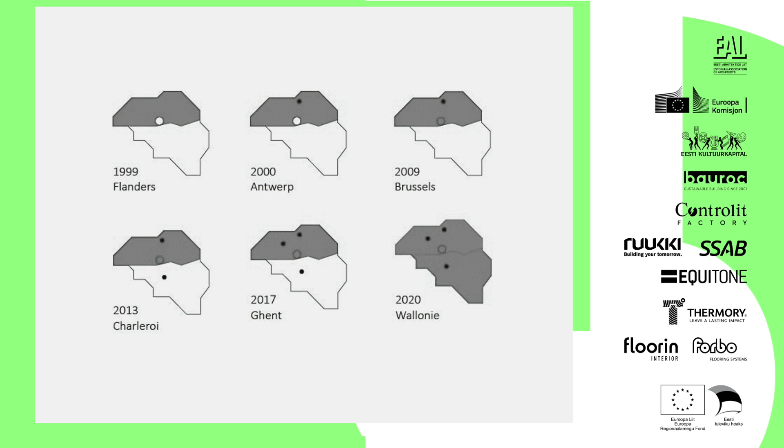So that's when they announced they would be having a bouwmeester immediately, but they are still busy discussing whether to do it or not. It's a tradition inspired by what is existing in the Netherlands, but which has been adopted in Belgium in a better way, I think. So we do better than the Netherlands. You should know there is always this kind of rivalry between Belgium and the Netherlands, firstly in football, but also in the bouwmeester stuff, and there we have been winning.

So the bouwmeester is not the head of the planning office, for instance. The bouwmeester is also not dealing only with the projects of the city itself. I'm also not deciding on building permits. I might be what is translated as the chief city architect, but it's not exactly the same. I'm also not just a consultant, and I'm also not a politician.

So what is the bouwmeester? The bouwmeester is an official. I'm working for the government and also appointed by the government, but working in an independent way. So you are recruited and you are paid to be critical. And why to be critical? Because the idea is to improve the quality of all urban projects. And if we're talking about quality, in the first sense, it's cultural quality. What you're building is for the future, is for the next generation. So it should be interesting. It should be the heritage of the future.

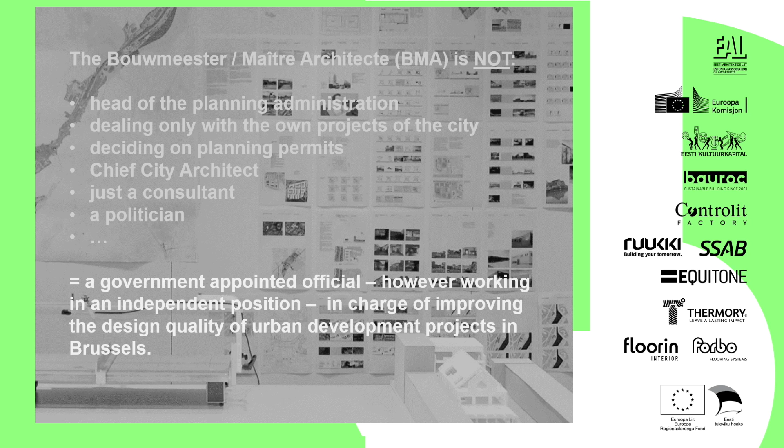Of course, we think about quality in a much broader sense, but this first element is really important. So the bouwmeester in Belgium and in Brussels is in charge of improving the quality of all urban developments in the city.

Sometimes I'm saying 'we', because the bouwmeester is in fact a team of something like 15 people now. A bouwmeester is appointed per term of 5 years. I'm doing my second term in Brussels now. I don't think you should do a third term, because from time to time the bouwmeester has to change in order to bring a kind of fresh perspective and to remain independent. If you're too much in the system, after a while you lose your independence, and then it's time to move and there should be another one. The procedure to appoint a bouwmeester is an open call, public procedure, and so on.

So I think you've understood, it's not about deciding. It's not about giving permits. It's not about hard power. It's about soft power. So we have to convince people all of the time. We have to convince the politicians to go in a certain direction. We have to convince private developers to make better projects. We discuss a lot. We build arguments.

So all of the time it's about this kind of work, and that's where you get your power. I think this kind of soft power, other ways of doing governance of urban projects in the city, is quite important. So you need, of course, the basic things: good building permits, good administration, interesting politicians, and so on.

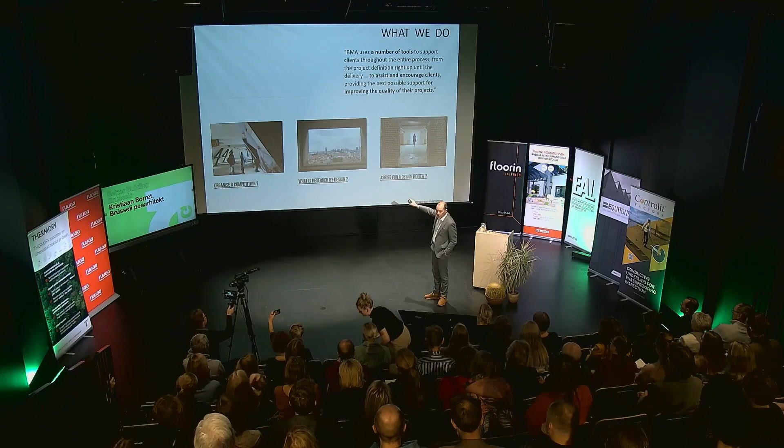What do we do in daily life? We have something like 3 pillars in our work. 50% of our time is organizing competitions. Then we do research by design, which I will explain. And we also have a classic system of design review mechanisms.

Competitions - we organize a lot of them because we think that's the main element to improve quality, and also to have public debate on what is quality of architecture and what is the best proposal. Something like 1 competition a week, so quite a lot for a city like Brussels.

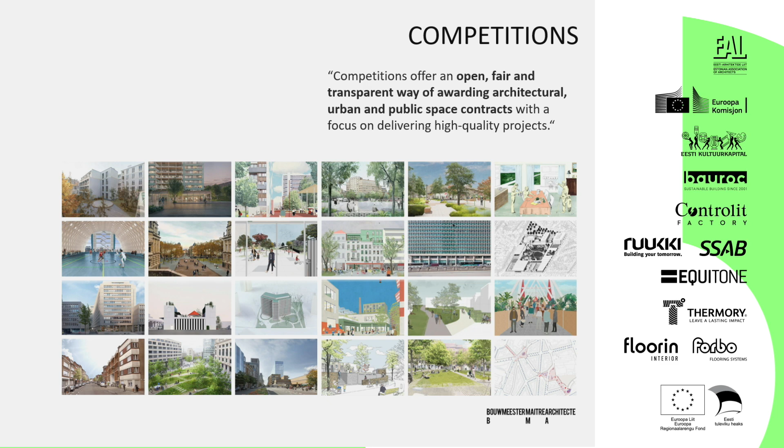We organize them in a fair way, so we have a set of rules. The fee for the architect is always fixed, so there's no competition on the fee. The architects selected, for instance 5 architects invited for the competition, are also paid for participating. So the conditions are fair and correct.

It's always a 2-step competition. The jury is professional, all these kinds of things. We organize it for big projects, for small projects, like kindergartens and so on.

Also for, you could say, ordinary programs, like a recycling station where you go to get rid of your waste. I think these kinds of ordinary programs deserve good architecture too.

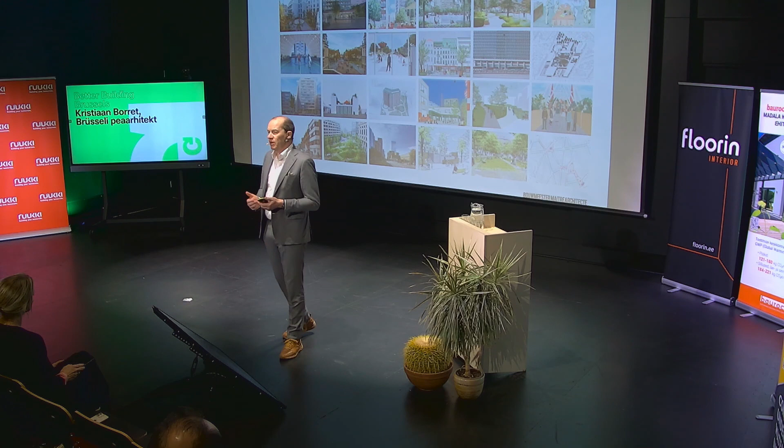We also do it for a lot of productive economy. In Brussels, we want to keep productive economy in the city - new economy, fab labs, innovating economy, but also ordinary jobs, like a place for a plumber. That's why in Brussels buildings are constructed especially for those kinds of programs, and we organize competitions for it, because we think those programs deserve good architecture as well.

We also organize competitions for private developers, so a lot of work is being done on that.

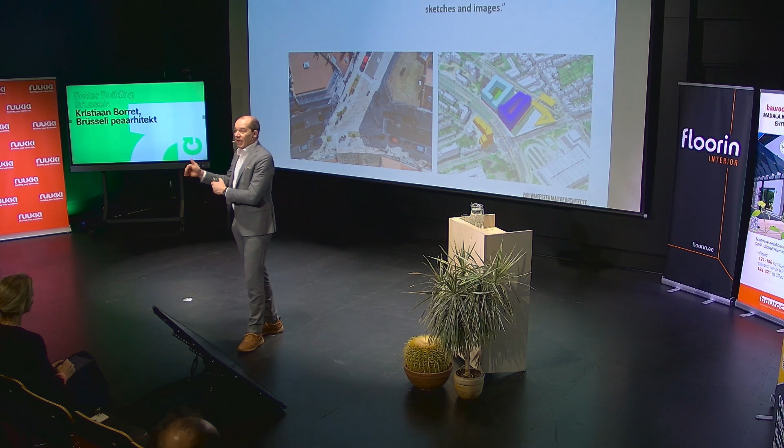Secondly, research by design. I hate it when we're discussing the quality of architecture or an urban plan and we just have texts - notes for government decisions, these important texts, or Excel tables with the profitability, the square meters, and the revenue supposed to come from it. But you can't build a city in Excel.

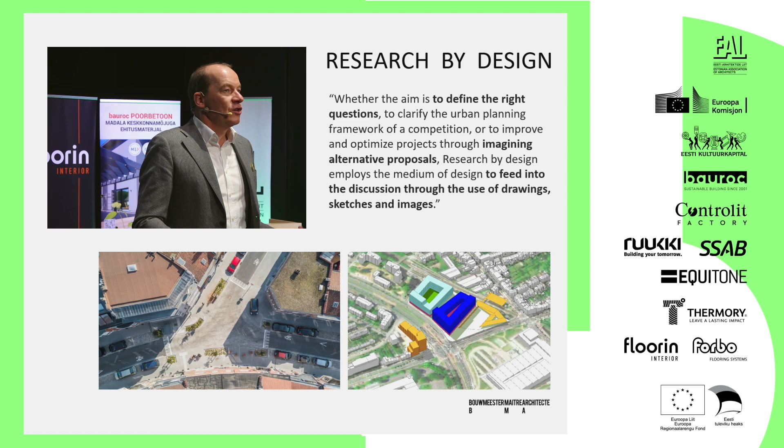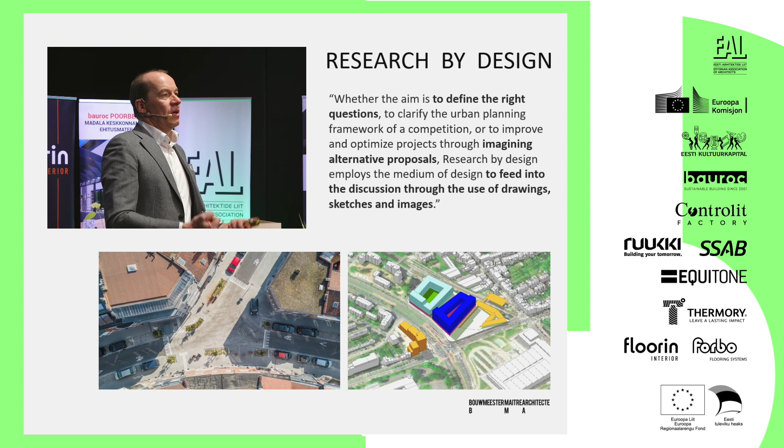So you need drawings, images, maps. I want these kinds of things on the table as well, because that's our tool - that's the way we architects and urban planners, designers, express ourselves. So that should be recognized as a medium that's important in decision making.

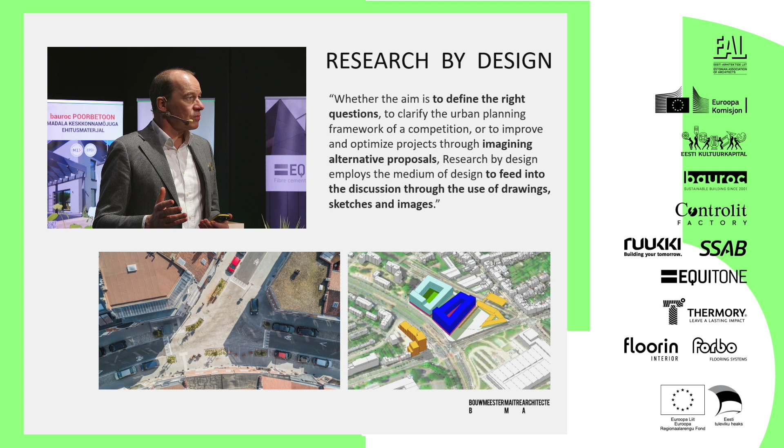That's why in the team of the Bouwmeester we have 4 people who are drawing, making design proposals - not to build them, because we don't want to build ourselves, not at all, and perhaps mostly the better architects are outside. That's why we organize the competitions, but we use the drawings to feed the debate, to show alternatives.

To translate an Excel table - we want 30,000 square meters - into a design. Then we show the image: this is 30,000 square meters. Do you want that? And in many cases, no, that's much too dense, and so on. It's representing what you've been deciding at the level of an Excel table. So it's a very simple example of how design, our tool, can help clarify things, to block projects, or to push projects forward.

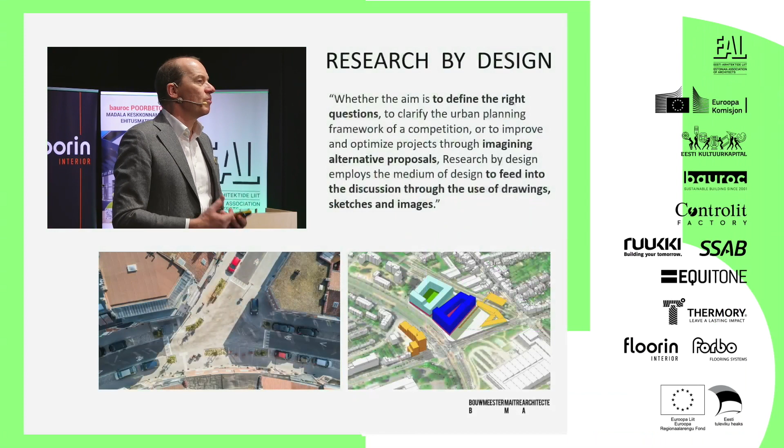Design and research by design should be part of the game, part of the policy on urban quality.

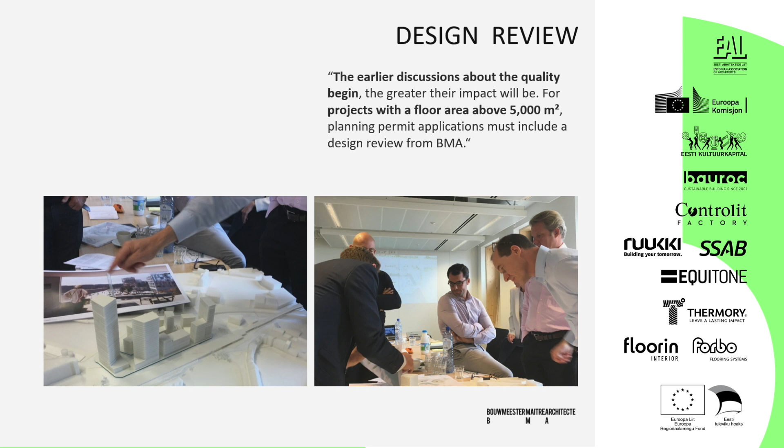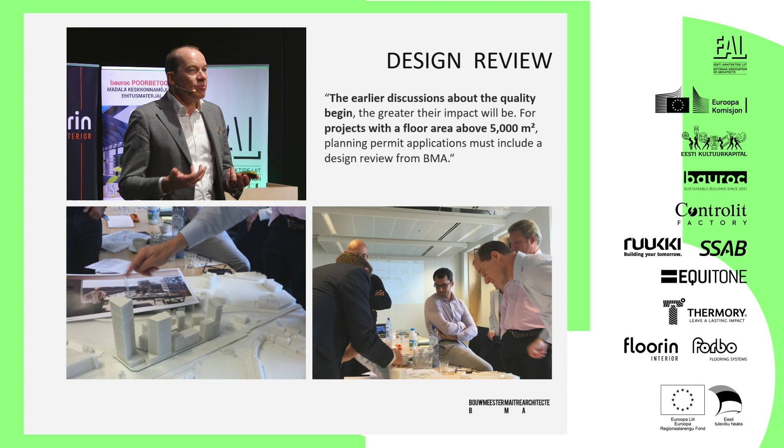The last thing is a rather classical thing. As a team, we organize discussions on projects. In Brussels, every building permit above 5,000 square meters has to get advice on quality from the bouwmeester. It's leverage to have private developers around the table, because they know you'll give advice, so it's better for them to discuss early, hoping to influence my advice, but I take the opportunity to improve the project. It's crucial in governance that you're there very much in the beginning—the more ahead, the better, because it's much easier to change or improve a project early than at the moment of the building permit.

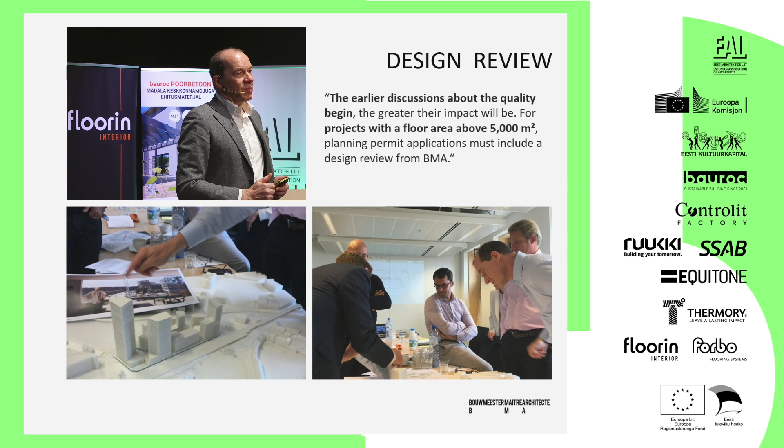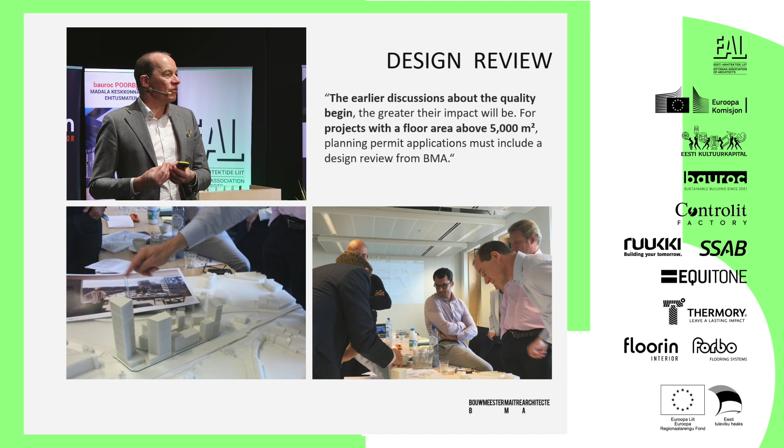If you want things changed later, everyone gets angry. The architect is angry because he's been drawing a lot. The developer is angry because he's been paying a lot. And I'm also angry because I haven't been involved before. So a clue for good design governance is to organize collaboration from the very beginning.

Now some words on Brussels, very shortly, and then I'd like to develop some ideas being discussed today in Brussels. This is Brussels—perhaps you know it, perhaps you've visited one of the European institutions. You can see a lot of things here. One should say it's not very beautiful, is it? It's a bit of everything, a hodgepodge. Brussels clearly is not a chic city, not a harmonious city. It's not like Bruges or Vienna—it's a bit of everything.

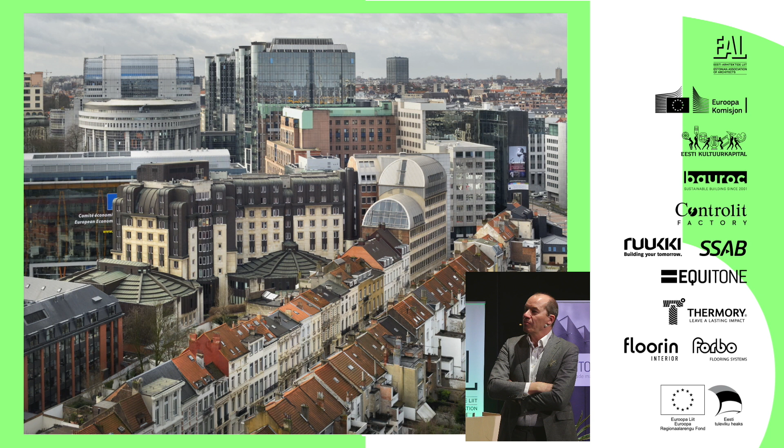It's there due to the fact that in the 1960s there was wild capitalism—Belgian developers demolishing entire neighborhoods. So it's the result of bad policy. On the other hand, it's there, so we won't change it anymore. That's why I prefer now to look at it in another way, and why it's important you also know this about Brussels.

This is about the population of Brussels—a growing city, many young people, many coming from elsewhere due to immigration. Today in Brussels, one of three people living here is not Belgian, has no Belgian identity card. Part of it is rich—the European expats. Part of it is very poor—recent immigrants not yet having Belgian nationality. So the majority in Brussels, two of three people, was not born in Belgium or has one parent not born in Belgium. It's coming from elsewhere. That means only one of three people in my city is like me, the child of two Belgian parents.

I'm a minority in my city. I'm becoming the exception. That's really important for us in Brussels—we have to change our perspective. What is typical of Brussels, the really Brussels guy, is someone who's not from Brussels, who arrived here, who chose to live in Brussels. That's what brings us together—all of us in Brussels have chosen Brussels, independent of our origin. I think Brussels is the most diverse city in Europe, and this is also the future of the European city everywhere—we should adapt to this kind of constellation.

Because you could say, of course, there is the urgency of the climate crisis. So if we want to change, if not now, then when? For us in Belgium, there was a kind of wake-up call last summer, '21, when in the midst of summer there was huge rainfall in Wallonia, a water bomb, floodings everywhere in small cities.

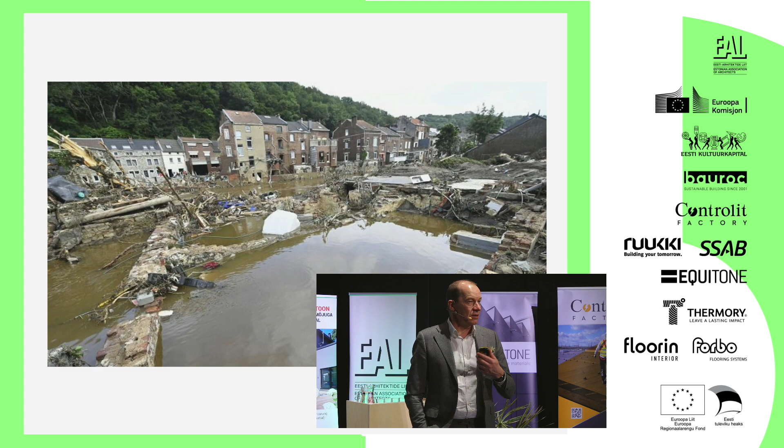39 people died because of a natural disaster in our country, where normally we don't have natural disasters. We just always have a bit of rain, but never this kind of awful thing. So it was a wake-up call, and it helped many people accept that change is necessary, that we are living in times of a paradigm shift. Also in our jobs, I think I'm witnessing it, I'm living it.

I know that I'm working now completely differently than 10 years ago, and it took me some time, and it takes me time every day to accept and act in that way. But I also think it's extremely, not only necessary, but extremely interesting, in fact, that things are changing. Indeed, you can't trust the future anymore. There was a time we knew how the future would be, and today that is lost. There is uncertainty, but that uncertainty, like diversity perhaps, is challenging, difficult, not always easy, but it's interesting, I think.

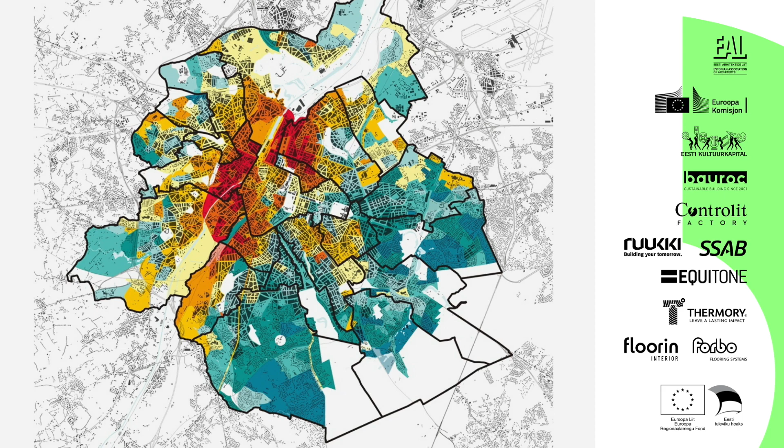For instance, one example, first really on the regional level. This is the kind of map of Brussels that I used 5 years ago. It's about density, so red is where there is a lot of density, a lot of built-up area, blue is where there are still many possibilities. The city has something like 1.2 million inhabitants. In those days, the map was used to look for where will we build more, where will we add some housing. Density was high there, but you could still do a lot of things here.

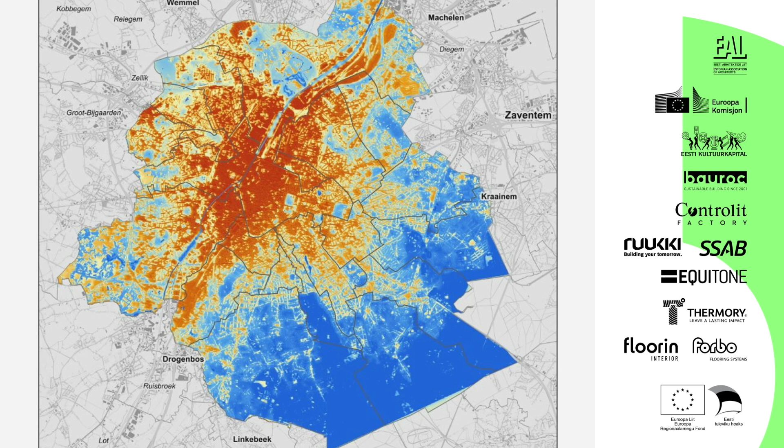And today, that is being discussed: not anymore where can we still build here, but how can we de-densify there? How can we get more blue in the red? In Brussels, in the last decade, the urbanism discourse was dominated by the number 10,000. That was 10,000 new inhabitants each year, so how to provide housing, how to densify.

Now we are moving, and that's exactly the paradigm shift that is happening, from 10,000 to the number 2. And 2 is the warming up of the planet, in our part of the planet, that could be expected, and that we hope won't be the case, but will probably be the case, especially after the Sharm el-Sheikh decisions. So that is the shift happening in our minds, in the mentality of urban planners and architects.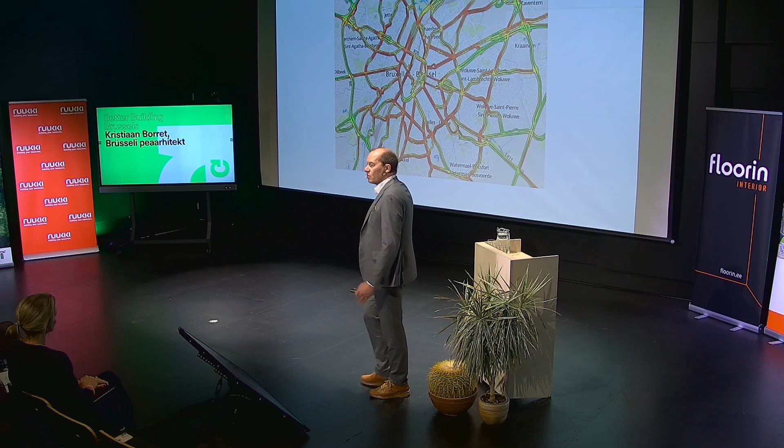So what is being done today in Brussels? Brussels is a car-dominated city with a lot of infrastructure, tunnels and roads and viaducts, also dating from the 1960s. So a lot of infrastructure, and still it's congested. So if you add some roads, okay, it works, and after 2 years that road is saturated as well.

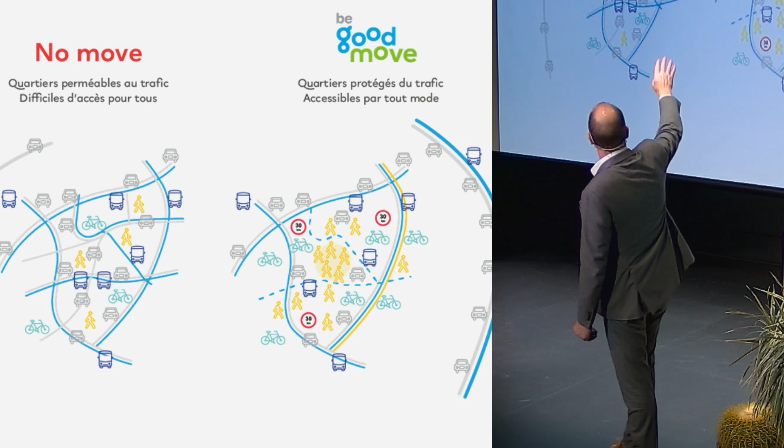So there is a plan called Good Move. That's a plan for the entire region that wants to do something different from the actual situation, which you could call 'no move' — many roads, but no move. So the new plan wants to get rid of transit traffic through the neighborhoods.

So the city will be cut up in neighborhoods where you can't drive through. That has already been approved for the entire city, so 1.2 million inhabitants. The maximum speed is 30 kilometers per hour. This has been in place for more than a year now, and you can really feel it in the city. There is a kind of calming, the city is becoming more peaceful.

The new plan for cutting transit traffic through the neighborhoods is leading to a lot of discussion, also aggression. Today there is a lot of polarization in Brussels between people who love their cars and who are demolishing all kinds of temporary traffic signs and so on. So it's not something that has settled. It shows very much how this paradigm shift is very present in daily life.

Because it's, of course, difficult to change your habits. We all know that, I know that. I have difficulty changing my habits as well.

That is, of course, on the level of sustainability, a stupid thing, because you produce a lot of new energy to construct the building and to produce new materials. But there is also the embedded energy, the energy already existing in the building, that gets spoiled, the energy that was once necessary to build it. That's why we are trying to develop a new general policy in Brussels of adaptive reuse, so that buildings should be reused, at least so that the concrete structure should be reused.

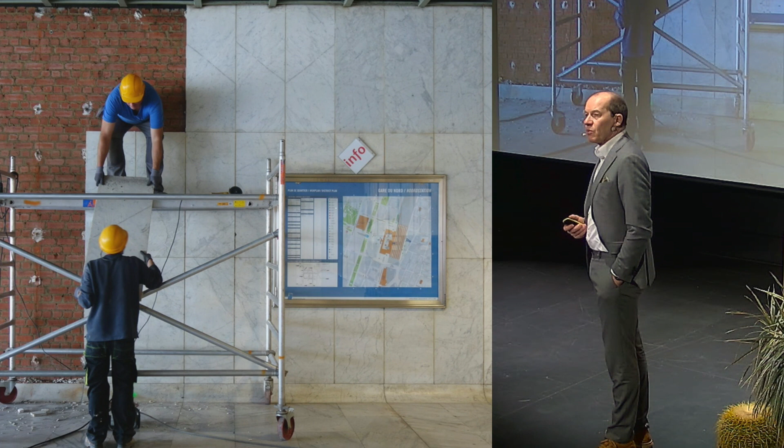And it brings also a new kind of cultural dimension, another kind of architecture. A lot of pioneering work was done by Rotor, a small Brussels agency that has been working for more than 20 years on the reuse of materials, and also developing a new kind of aesthetics, so that a piece of marble that is perhaps a bit scratched or not new is also beautiful because of that reason.

And also because you know that this marble, for instance, comes from the North Station, so there is a history about it. What Rotor has been doing is going to building sites, having a contract with the owner, then removing and dismantling some materials and selling them on the market, on a kind of online market, in the beginning mostly to architects and interior designers, but more and more to all kinds of people. It's a bit cherry picking, because they take the best parts of the building, of course.

In fact, it's not new. You could say it's a tradition that we have lost. Now we are used to always using new materials, and we go to China, Bangladesh and India in order to import natural stone.

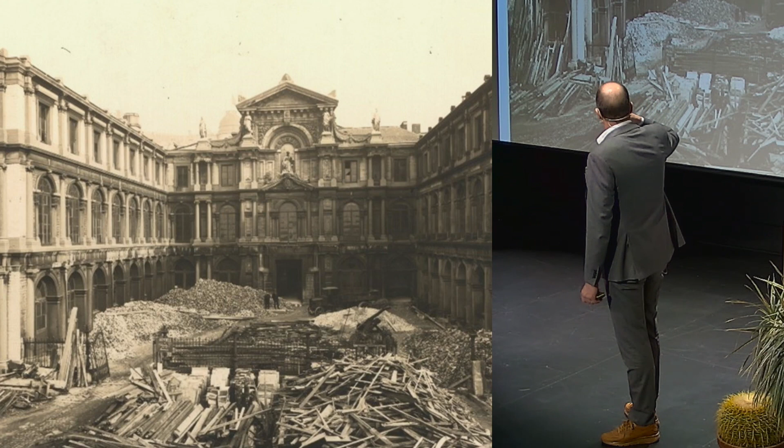Even this photograph from the 1930s in Brussels shows it: a historical building from earlier times, the Palais Granvelle, was to be demolished. You can see that they prepared the demolition by sorting out all kinds of materials, making a kind of recycling, a triage already done. But the interesting part is that there is a small sign saying 'façade et matériaux à vendre', facade materials for sale. So the facade itself was for sale, the idea was not to demolish it but to offer it for sale and reuse it.

The facade was bought by a small municipality that has been reintegrating it into its new city hall building. It's this kind of idea that we want to push forward, back on the agenda.

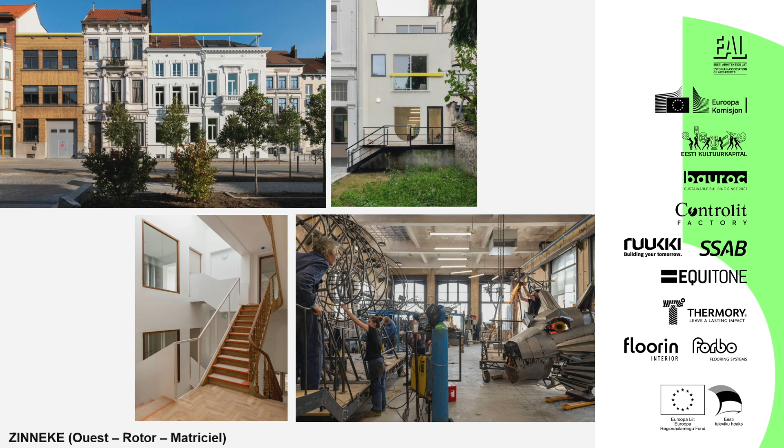So this is a project I can show. I don't know what happened, but all the credits of the architects have been lost. Okay, no, they are here, just in the black border. I want to be respectful towards the architect: this is a building by Ouest Architects with the collaboration of Rotor, the ones who were working with the marble. It's some 19th century houses in Brussels with a big hangar on the backside.

And there will be a cultural association making a parade each year. The idea was to keep the building and also develop a new kind of architecture that integrates old and new elements.

This is very visible in the staircase, where you have both at the same time, but also in the back facade of the building. These architects developed a cultural dimension of sustainable architecture. Sustainable architecture is not just about emissions, it's also about good architecture, about this public aspect. And that's why the public administration has to adapt as well.

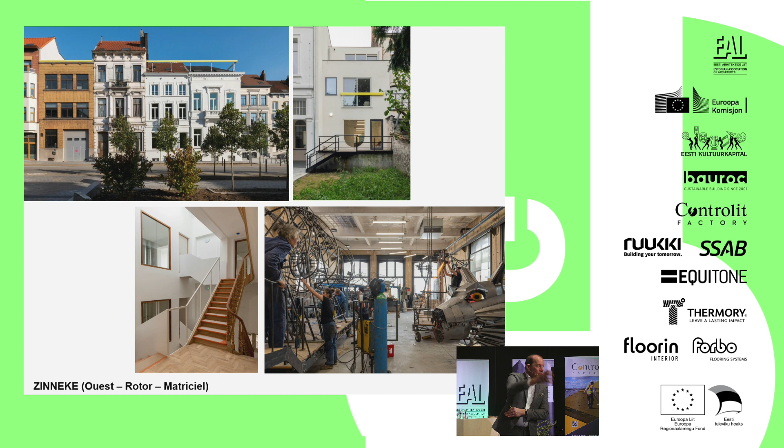The nice story is, you see the window that is curved. In the building permit, they knew they wanted a window there, but they didn't know exactly which kind, because it's a reused window, and so it depends on availability. The building permit is issued about a year before the building site, so you don't know yet which window you will find.

This is historical. It's the first building permit in Brussels with a dotted line, where it was indicated that in this zone there will be a window. Normally the building permit administration wants precise information.

So they made a joke of it. They found a window which is normally oriented the other way, with the curve on the upper side. Then they said, okay, we'll go wild, we'll turn it upside down to challenge the public administration, because we have the ability to do what we want within the limits of the dotted line.

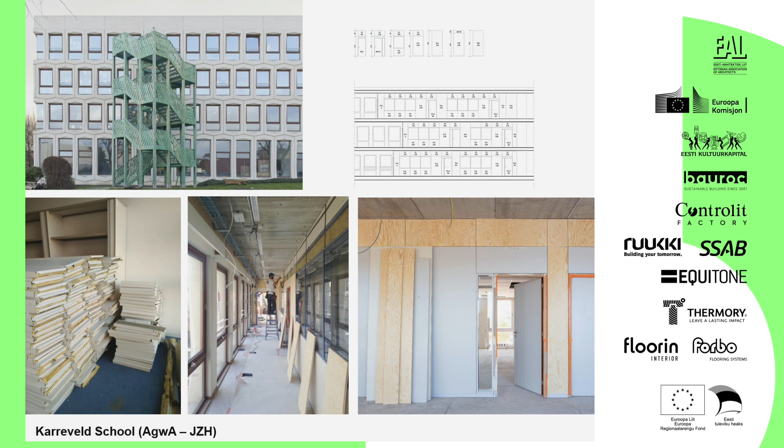So that's the cultural project, the first one. This kind of client was into the idea.

The second project is a school, also special, because we have to build schools very quickly - there's a need, we don't have time for new buildings. There was an old office building, a concrete cast or prefab structure from the 1960s, considered an ugly, banal building. Well, it has been reused as a school. We organized a competition with the Bouwmeester team, and they added a staircase in wood so that it's perfectly circular on the outside.

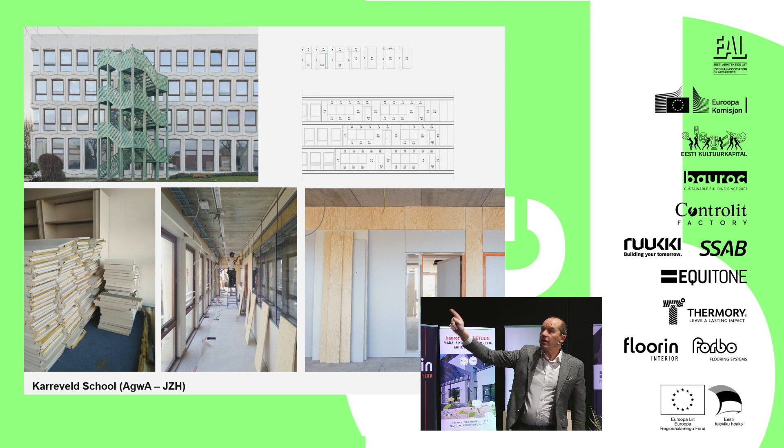The strength of AgwA, the architects here, was that they said: okay, we will not just reuse the outer shell of the building, we will reuse all the partition walls of a typical standard office floor. So they made a huge inventory, a lot of bookkeeper's work - which kind of panels do we have? And they restructured it in order to make classrooms in the building.

So now in the classrooms you have these existing panels, and what they've added is in visible plywood. One could say it doesn't look neat, it's not smooth architecture, but it's another kind of aesthetics being developed now. And the building works very well.

Next example, and now it's about mainstreaming. Competitions for a cultural client, for a public school - those were special circumstances. This is a mainstream real estate development in Brussels: an office tower in the center of Brussels being refurbished. Of course, in the 1960s it was a brutal error to build such a high building 200 meters from the Grand Place, in the medieval part of the city. But it's there - let's try to embrace it, make it better, and accept it.

So the private developer really wanted to work in a circular way, and the most important part of the project is again a kind of inventory of all existing materials - how they can be reused on site, but also materials coming from elsewhere, like the hexagonal tiles, very beautiful tiles made by a famous Belgian designer for a bank headquarters, now being put here.

Also materials from this building go to another building. For instance, the ventilation system of this building, a huge machine on top of it, wasn't modern enough for the future use of this building. So it has been sold to Zinneke, the first project you saw with the upside-down window, and is being reused there. So in Brussels, the idea is to have a continuous internal market of moving materials and reusing them, sometimes in the same building, sometimes in another.

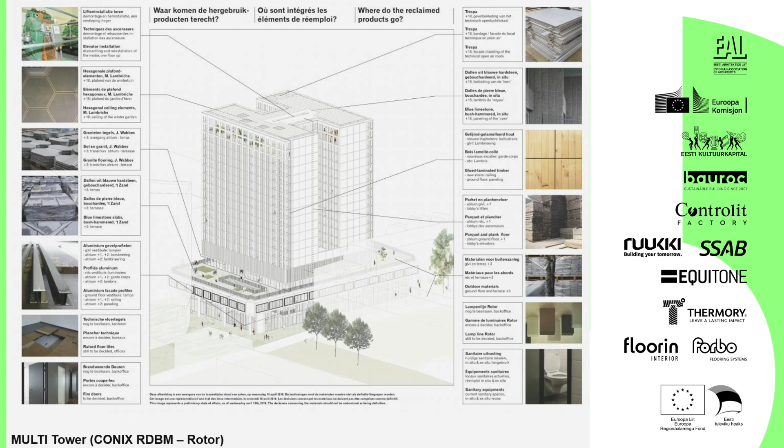And that's why this is my last example in this series. This is in the heart of the European district. So when we are talking about mainstreaming this idea of circular construction and reuse of buildings...

It's important that there is also a project in the heart of the problem, where there was this habit of always demolishing buildings. The first idea of the developer was to demolish this office building and build a new one with higher floors and so on. We convinced them not to do that.

Together with all the public authorities, we said no, and then we organized a competition. So the facade is kept, is cleaned, is insulated from the inside. There is a new heating system and so on.

But the main intervention of the architects is not very visible, but extremely important. Because on each floor, you had huge cores with staircases in the wrong place, and also very thick concrete columns, so that the floor was not open and airy like they wanted now in office spaces.

That means that on the inside, the building changes completely. It becomes an open, clean floor.

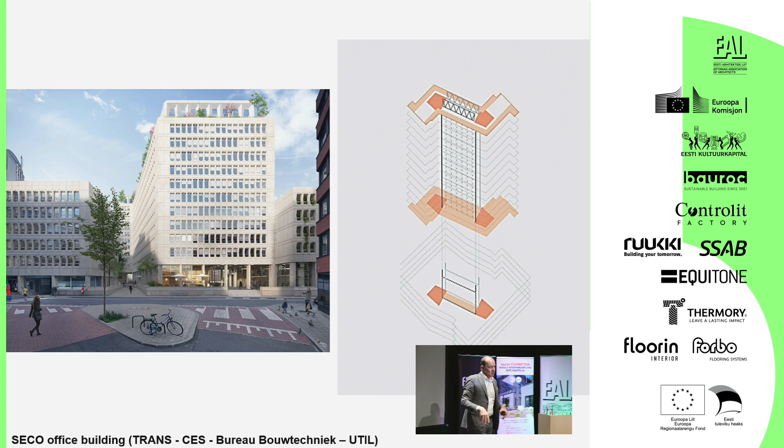On minus one, because there are no bearing columns anymore going to the foundations on that spot, they add a huge conference hall for conferences and congresses. So it's an update of the building, it's architecture, it's creativity, it's invention.

You need to organize a competition to have this kind of idea, but it's not about the color of the facade or the proportion. It's about a new kind of aesthetics in architecture that is about something else, that is also not about the personal style of the architect.

If you are interested in these kinds of adaptive reuse building projects in Belgium, you don't have the opportunity to put your mark on it, to have your style. You have to be intelligent, you have to be contextual, you have to understand the building and do something with it. It's a loss up to a certain level, but it's also something else that comes into place.

Last thing, because I have something like 5 minutes, 10 minutes, or not? Five minutes? Ten minutes. Okay, well, I'll speak slower then.

New agents. So, of course, a city today is not made anymore just by the king or the mayor or the government or the bouwmeester or a public authority and so on.

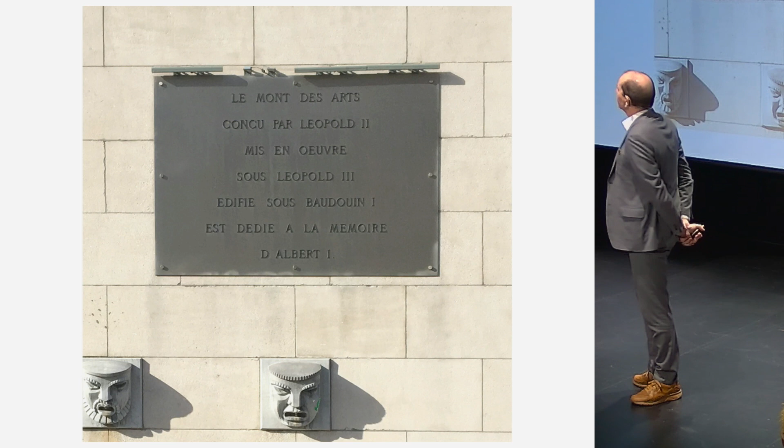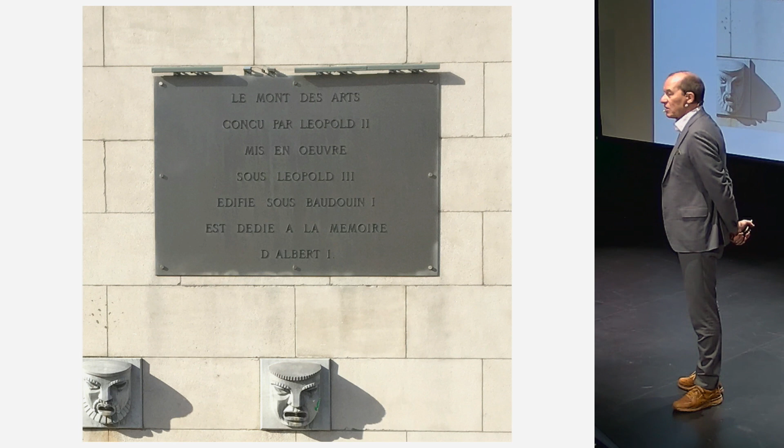That's not easy, because public authority has another tradition, and it goes, in many cases, also very slowly, especially in Brussels. So this is the Mont des Arts. It's a major central area with a museum and a library and so on, just between the lower city and the upper city.

There is this kind of memorial plate that says the Mont des Arts was conceived by King Leopold II, that's 19th century, started under Leopold III, then built under Baudouin I, and then, to make it really ironical, dedicated to the memory of Albert I. So it takes four kings to build this urban project.

So that means that our traditional system doesn't work because it takes too much time. It's ridiculous. And then you have this kind of project in Brussels, along the canal.

So we don't have an open-air swimming pool in Brussels. You can think, okay, is that important? Well, it is important because for many youngsters living in Brussels who don't have the money to go to Spain, Italy, or the Belgian coast, in the summer, especially in warm summers, you need this kind of swimming pool as a kind of escape.

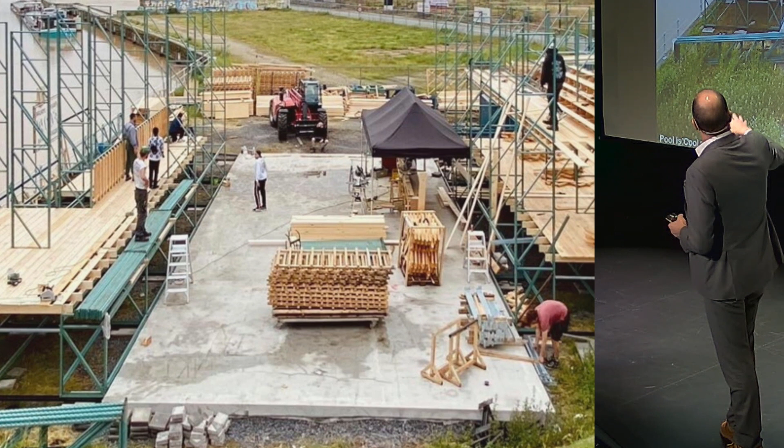So there is a group of people, a citizens association, that makes the plea to organize a swimming pool in Brussels. They want public government to invest money in a public open-air swimming pool. The association is called Pool is Cool. And after so many years of activism, they said, well, now it's enough, we will build our pool ourselves. So they did some crowdfunding, and they started building a pool, of course a small pool, along the canal.

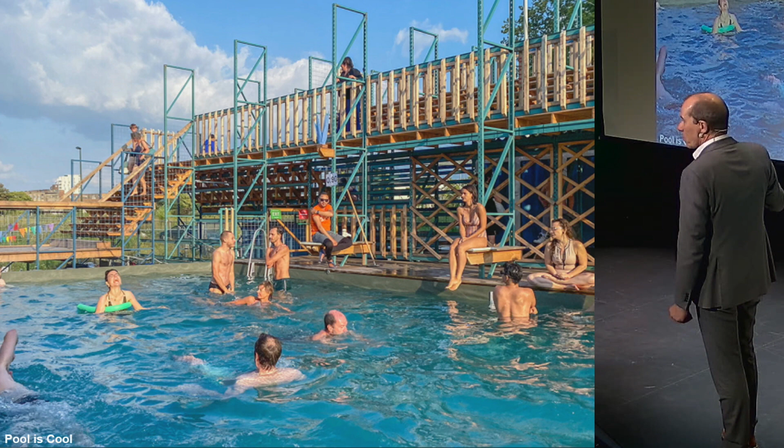It looks like this now, and it has been a huge success. So the only open-air public swimming pool in Brussels exists now, but not thanks to public authority, but thanks to citizens' initiatives. That should make us, me, modest. And that's also perhaps something we should learn, that public authority should try to collaborate more with these kinds of professionals and these kinds of people who are willing to invest in the city.

Another example: this is Filter Café, an association of young parents protesting against the fact that in streets where there is a school, in the morning there are a lot of cars, so the emissions are even worse in that street at the moment all the children are outside wanting to enter. So why don't you close off the street at certain hours of the day, in the morning and around 4 o'clock when school finishes, so that the air is cleaner, the traffic is calm, and there is more security and so on.

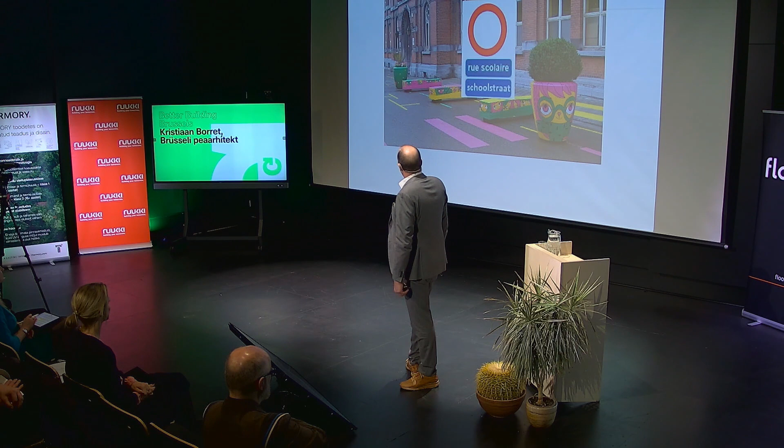So after a lot of protests, in the end they've won, because now in the traffic regulations we have a new traffic sign that says School Street. That means at certain hours the school street is closed, and everyone knows it. So it's a kind of victory again for those people.

That made us think, us or the government. And so now, during COVID times, there were a lot of initiatives, and we turned it the opposite way. We said, okay, we have some money to organize summer events in the city, a staycation in the city, because we can't go elsewhere. But we know you probably have better ideas than we do, so we will not organize it ourselves, we will offer you the money, and organize a kind of call and competition to select projects. This happened in the summer of 2020 and 2021 as well.

There were wonderful initiatives of streets that were closed down, organizing activities for the children, painting the streets so it would be clear this is a summer street, and so on. So it's an example that we have to provide a framework, provide investment and subsidies, but we don't have to do everything ourselves, that we can trust associations to do it and to take over the city.

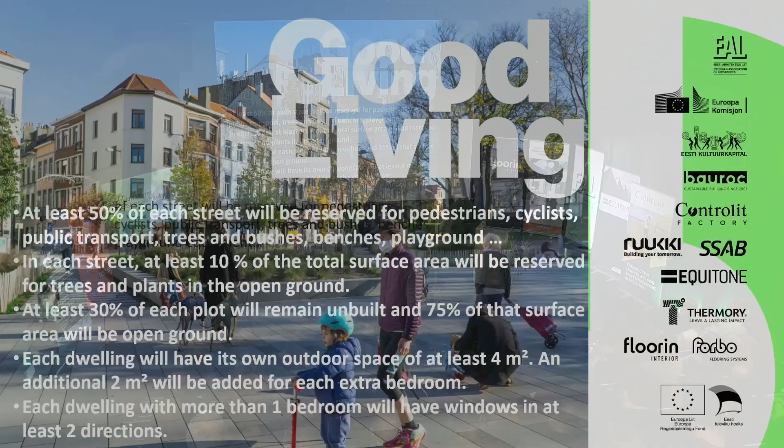That's why with the Bouwmeester team, we don't despise working on regulations, building codes, dull stuff. Not just fine competitions and big strategic projects, but also the very basic, stupid, annoying regulations. I think they are also important to change a city.

In Brussels now, the government is working on a reform of the building code, the regulations that apply to all building permits. You know, this kind of thing, so the building can't be 3 meters higher than the building next to it, and so on. But it's an opportunity to have a lot of new regulations that go for the paradigm shift, for fighting heat island effects, for greening the city, and for improving the quality of life of people.

So for instance, in the proposal now, and this is very drastic, the idea is that for all streets, all public space, maximum 50% of the space can be dedicated to car traffic. So 50% has to be reserved for something else. That means public transport, cycling paths, pedestrians, green space, and so on.

Also, in all streets, 10% of the total surface area should be for trees and for full ground, true ground, where water can infiltrate. Each building plot, 30%, especially in the city center, should remain unbuilt, and of that 30%, 75% should again be full soil, true soil, where trees can grow and water can infiltrate.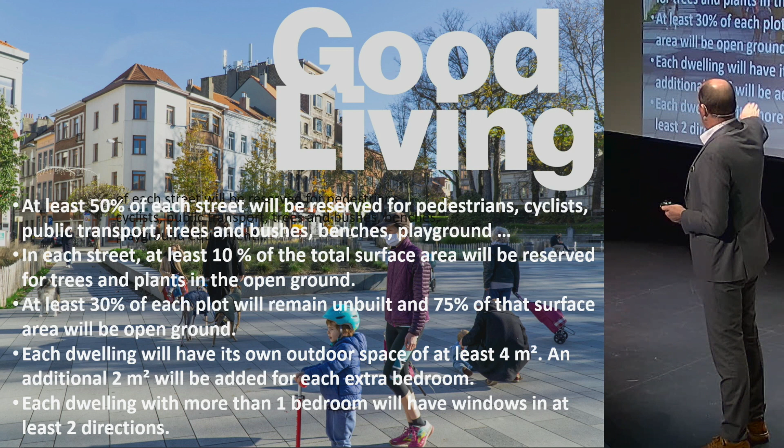Some last elements deal with the quality of life of people — lessons learned from the COVID pandemic. In Brussels, it was not the case, I don't know how it is in your city, but now, for each dwelling, an exterior space, a balcony or a terrace, will be obligatory, minimum 4 square meters, or 2 square meters per bedroom in the apartment.

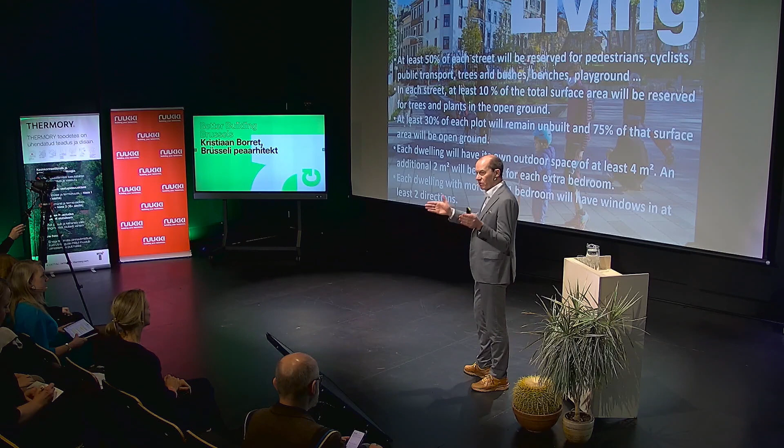Also, apartments with more than one bedroom should have windows in at least two directions, so they can't be mono-oriented. They should be on the corner, or transversal, so you have daylight conditions on both sides and different daylight conditions, so that you're not only oriented towards the north. Again, small rules, but if you multiply them, they are very important in improving the quality of life in the city, and if you think long term, it's important to change the standards.

So that's the kind of paradigm shift that we are trying to develop now in Brussels. Thank you.